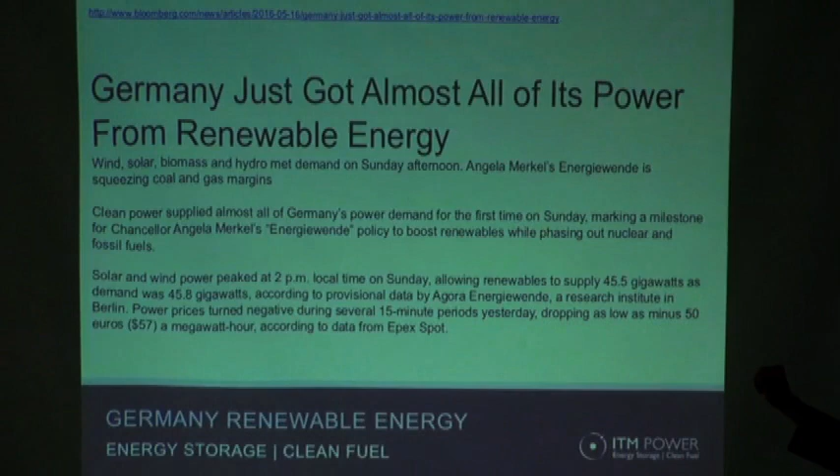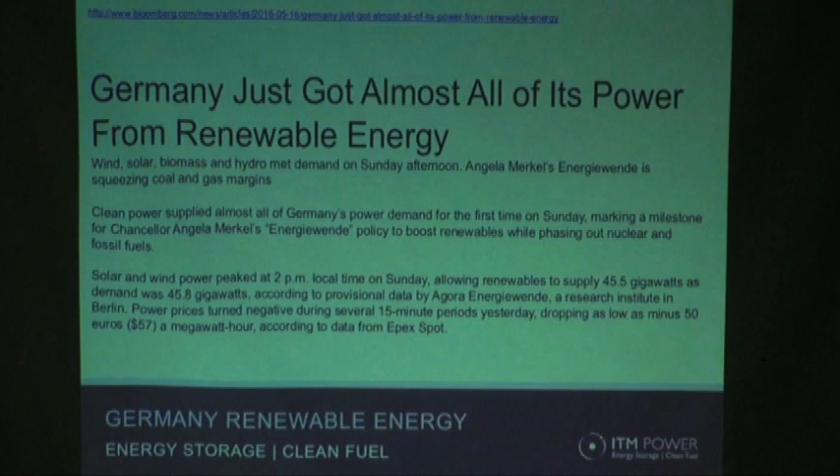This last weekend, the Germans actually produced from renewable energy roughly 46 gigawatts of power, and their demand was just slightly higher. So in essence, what they achieved on Sunday was providing all of their demand requirements with renewable energy, which is a huge milestone, right?

Angela Merkel is obviously on the pathway of making it happen. She was the chancellor that really put into place photovoltaic and wind, and stopped nuclear power plant production of energy in the future. So that's the story. In the presentation there's a link to the Bloomberg article, which is quite interesting to look at in terms of this milestone. I thought I'd throw that in just to show you what's going on in other parts.

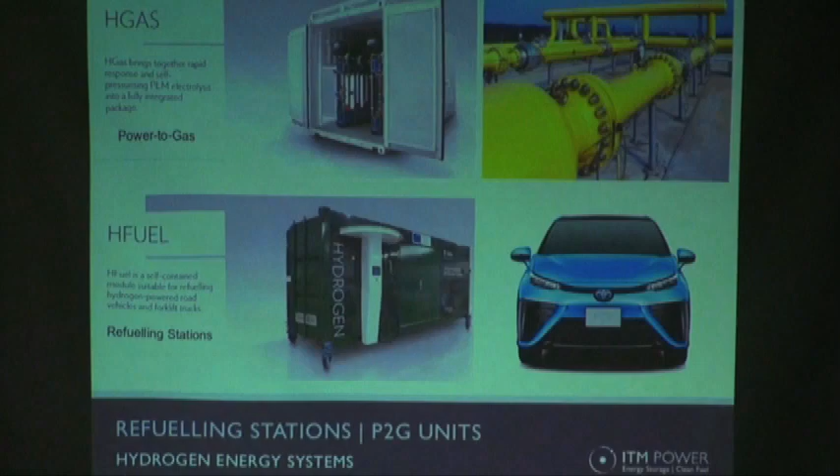So what does our company do? We make hydrogen, and the key is to make hydrogen out of excess energy. I'll show you some graphs later on. When you have an abundance or predominance of renewable sources, you end up having a very variable supply, and also in many cases large excesses which are currently being curtailed. The idea is, what can we use those assets for instead of being curtailed, and store the energy? So we'll talk a bit about that.

The businesses we're involved in are fundamentally generating hydrogen from excess electrons and then using that hydrogen for a value chain that makes sense. You can actually use the hydrogen to generate electrons if you wish. It's not a very efficient system, but it's an opportunity. You can also use that hydrogen for the production of ammonia, for a fuel or for fertilizers.

The other part of our business, and we were talking at lunch about electric vehicles, I'm a fuel cell electric vehicle guy because I don't want to sit around for three hours and charge my car. I'd rather fill it up in three minutes and drive away, with a range that holds up even when it gets cold. Nevertheless, I think battery electric vehicles are going to find a place. We support the provision of hydrogen for the operation of fuel cell electric vehicles. We'll show you a few pictures of what's happening in other parts of the world. So that's what the company does.

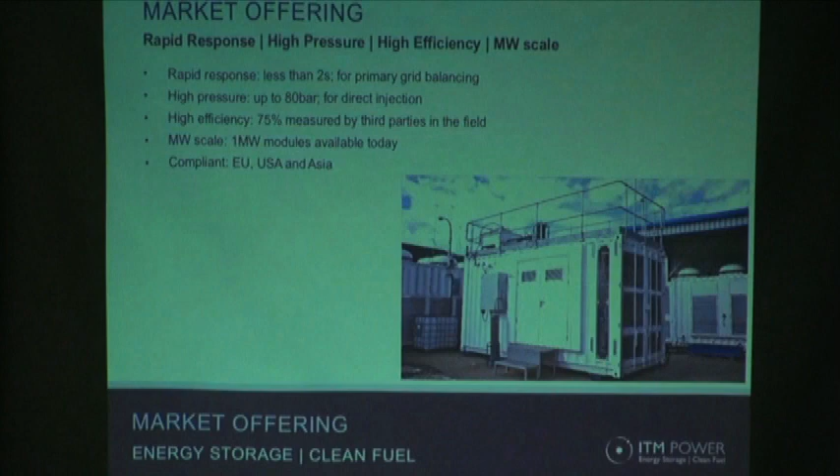What we make and deliver as our fundamental products into the marketplace are PEM electrolyzers. Now you might ask, electrolyzers have been around for decades, what's new? The electrolyzers of the past used a specific type of membrane that operated the product at a stable, constant level, and provided hydrogen from electrolysis primarily as a feedstock for the chemical industry. What's happened is electrolyzers are now being pulled more into the energy industry, meaning they have to accept variable quantities of energy supply to produce hydrogen.

So they become demand response type products. The technology that we and others, including companies like Siemens, are now producing are PEM electrolyzers, solid membrane products. For the electrochemists in the audience, ITM is an acronym for ion transport membrane. That's where the company had its foundation, in polymer chemistry, producing a membrane that is now used in the electrolyzers that they sell.

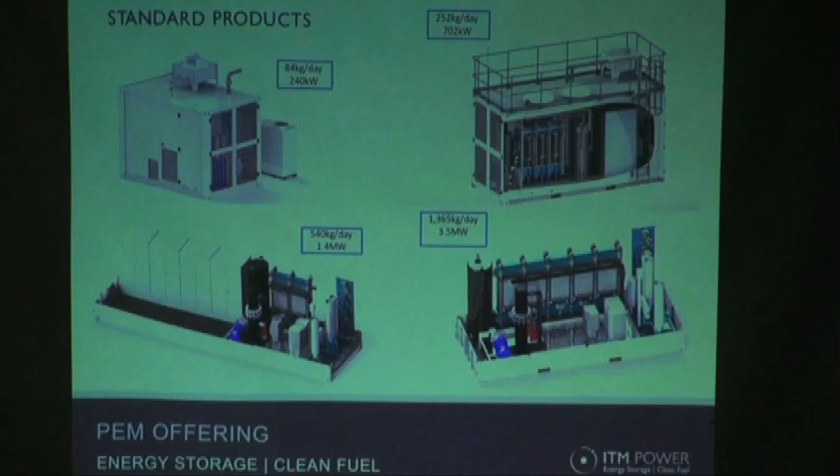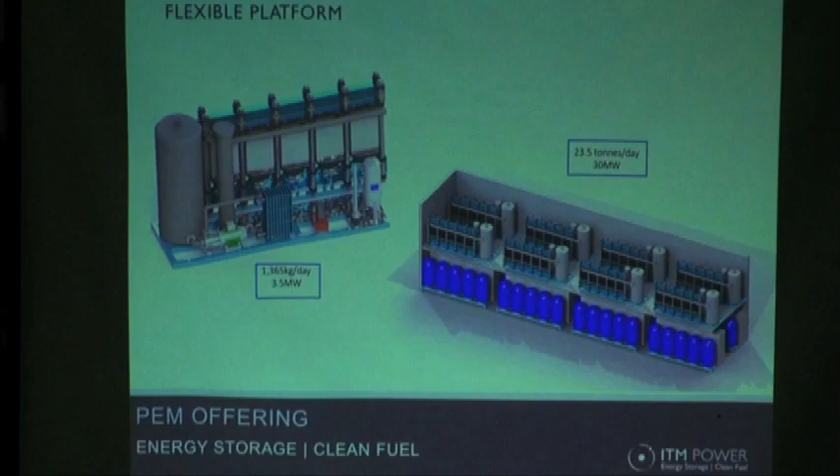A bit more about the pallets, just to give you an idea. We have a standard set of products that we deliver into the marketplace, basically a quarter megawatt up to a 3.5 megawatt product, using state-of-the-art electrolyzer stacks to convert water using electricity into hydrogen and oxygen. We also have the ability to customize products in terms of size. I've been in discussions with Bob over the last year plus, and things have changed since then in terms of our cost reduction, so things are happening pretty quickly in terms of providing competitive products into the marketplace serving the energy industry.

So this is all background information. Let's talk a bit about the rationale behind what we do and what we supply to the market in terms of being able to use that energy. Why hydrogen as a fuel?

When you think of renewable energy and a renewable energy chemical, what comes to mind? Hydrogen is probably the most abundant chemical fuel on the planet. The only challenge is that it's bound up in water, and that's what the electrolyzer does - it separates the hydrogen from the water.

It separates the hydrogen, and produces oxygen together with that. That's basically how an electrolyzer works. It's simply a membrane in the middle, surrounded by catalysts, with electricity applied to specific electrodes on either side of the membrane. On one side, hydrogen is generated, and on the other, oxygen.

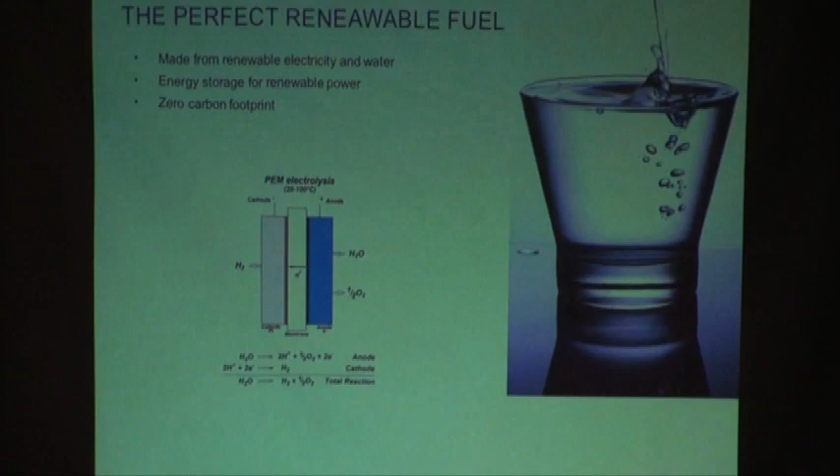So for the non-chemists in the room today, think of the school electrolyzers we used to play with, putting two terminals into a beaker of water.

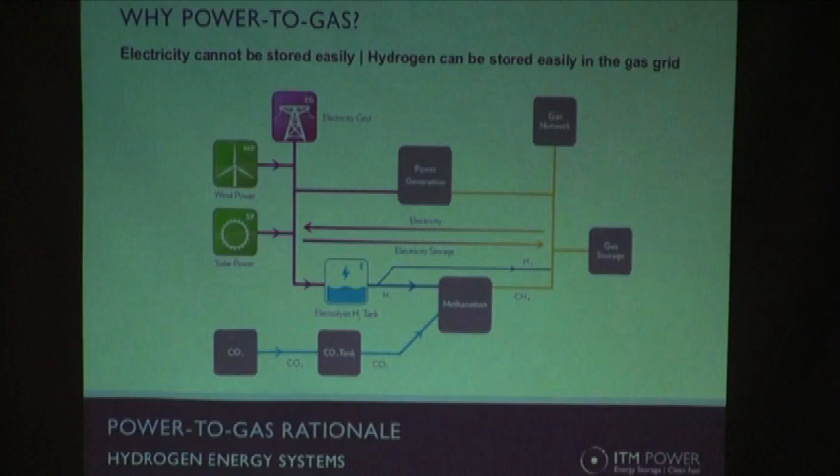Energy storage - a term called power to gas was invented, or founded, by a German engineer approximately 15 years ago, when Germany started deploying a lot of wind energy, which generates electrons mainly at night as opposed to during the day when they needed the energy. As time progressed, they thought about ways and means of storing it.

How do we store energy that comes from turbines, or in the south from photovoltaic sources? Basically, the idea was: we've got, in their case and in many parts of the world including North America, huge storage infrastructures. In fact, the largest energy storage infrastructure we as humans have installed on the planet is natural gas grid networks. In North America, our gas grid networks store roughly 60 days of energy.

I'm not sure whether you realize that, as opposed to only delivering it to homes and industry, they store energy. The Germans store roughly about 3 months, and so did the folk in the UK. So it fundamentally provides an asset where you can store energy.

And what's happened as part of the story in Europe is that they store the hydrogen, not only as hydrogen, but inject it into the natural gas grid network up to a specific percentage - that's called power to gas, one of the pathways to power to gas.

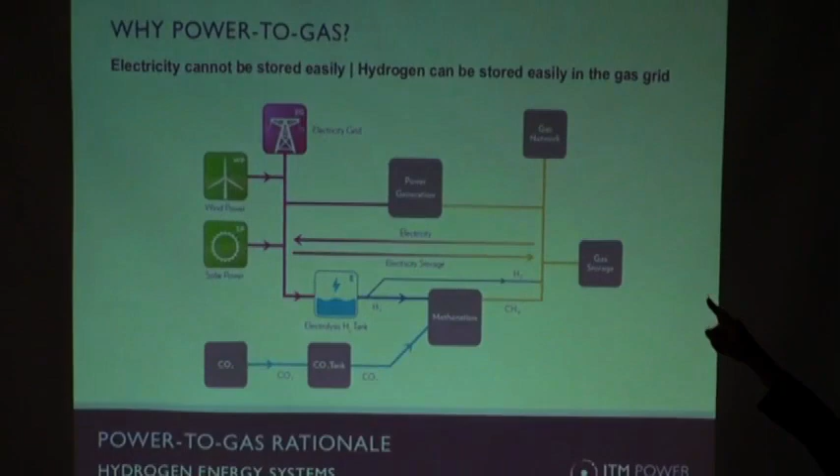So when you look at the picture, on the left-hand side is generation - the actual electrolysis producing hydrogen. Of course, the oxygen has value, but we don't capture it now - it's vented to the atmosphere. It can be captured and used.

And then that hydrogen is either directly injected into the natural gas grid network as a storage medium to be used - use your imagination, whatever natural gas is used for downstream.

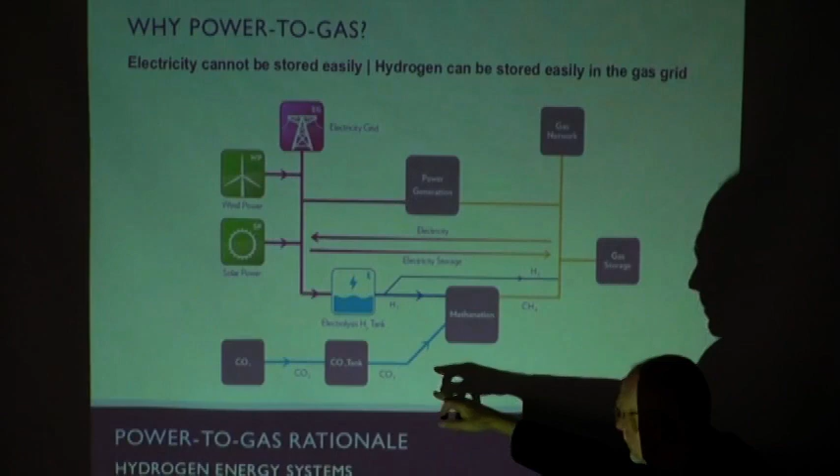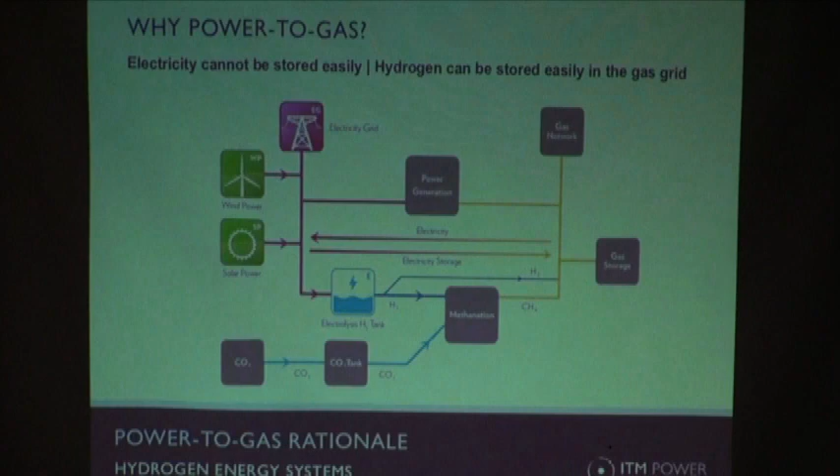Or it is reacted with CO2, preferably carbon neutral, from sources like anaerobic digesters, wastewater treatment plants, or dairy farms. Any source with anaerobic digestion of organic material is a candidate, producing synthetic methane that then goes into the grid.

There's a lot of work happening in Europe to help grid owners also become green - in other words, to provide renewable heat, which is the fundamental and primary purpose of gas grid networks throughout the world, heat as opposed to electricity. So that's a bit of the background in terms of power to gas and some of its pathways.

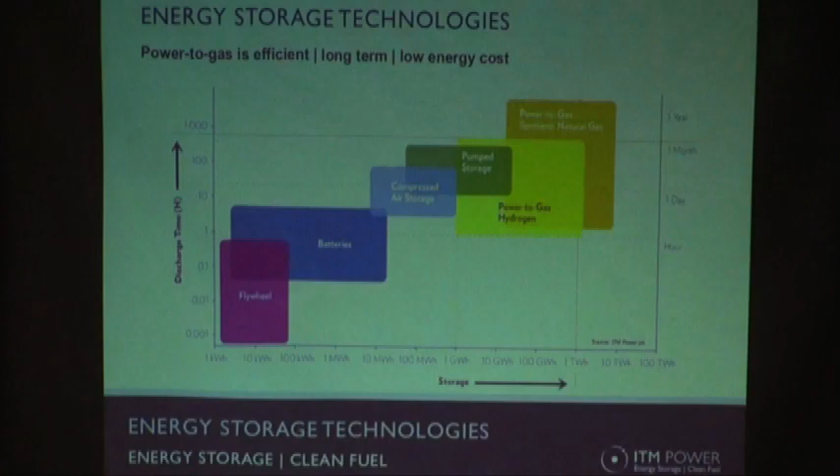Energy storage - maybe some of you have seen something similar to this, but this is quite an interesting graph in that it talks about energy storage across a number of continuums from a technology perspective. On the far left you see flywheels, and as you move up the order you see batteries of different shapes and sizes, flow field batteries, compressed air, and in that large storage sector at the top right, pumped hydro, which is probably today one of the largest seasonal energy storage technologies, followed by power to gas, either using hydrogen and methane, or synthetic methane.

Now you might ask, why and how do we put hydrogen into a natural gas grid network? Because hydrogen has a totally different burning and oxidation characteristic to what natural gas, primarily methane, in fact has.

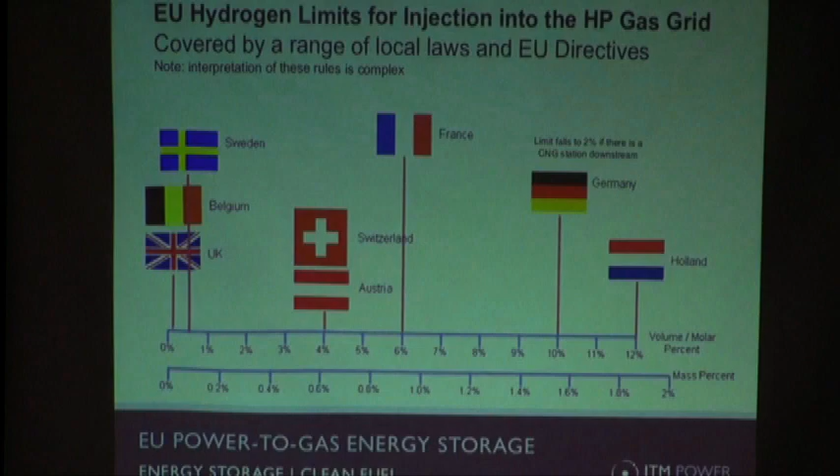There have been a number of studies on this, and there are limitations in terms of how much hydrogen you can put into the gas grid network before the flame burn characteristics change. In Europe, the country with the highest limit is Holland, and for historical reasons the lowest is the UK, although 20-30 years ago the UK had town gas in their systems, which is roughly 60 to 70% hydrogen. The reason those levels exist today has to do with rules and regulations associated with the purchase and supply of natural gas, primarily from Russia.

The change in Europe is taking place where the natural gas grid networks will probably, throughout the European Union, accept up to 5% hydrogen in their gas mix, which will not change the calorific value of the gas and will not change the burn or flame speed characteristics of natural gas either, but will provide terawatt hours of energy storage, for example, from wind turbines that are currently operating and being curtailed.

I'm sure you'll have questions about that at the end.

Here are some examples of the plants we have in place. This is the first one we put in place, just outside Frankfurt, east of Frankfurt, on the Main River. We did this project with one of the largest utility companies in Germany, the Thüga Group, which operates as a consortium, a collaboration of various utility entities around Germany.

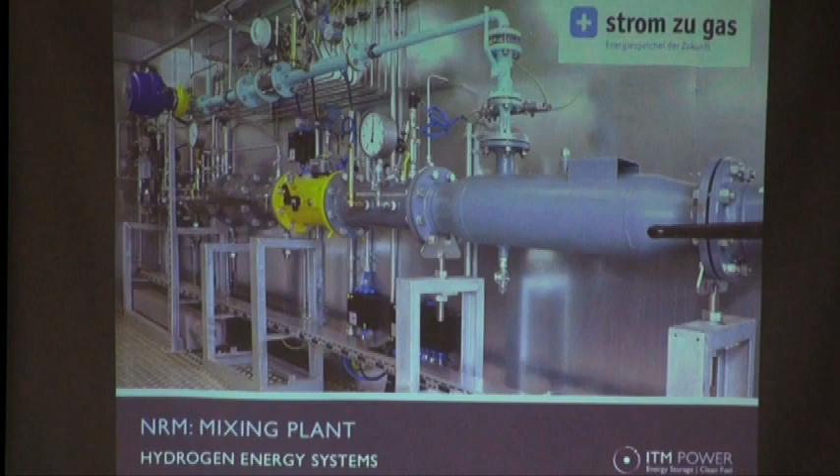This plant takes excess energy and, at a transmission distribution gas node, puts it into the gas stream up to approximately 2%. Why 2%? Because just down the road from this plant is a CNG compression facility that produces CNG for vehicles, and they asked to keep the level down because they have metal tanks in the cars. That's the gas mixing plant there for you.

Our second project was with RWE, a very large German utility entity that is currently having major financial problems. They have red figures on the bottom because they haven't really joined in and are only slowly coming on board with these new types of technologies being deployed throughout Germany.

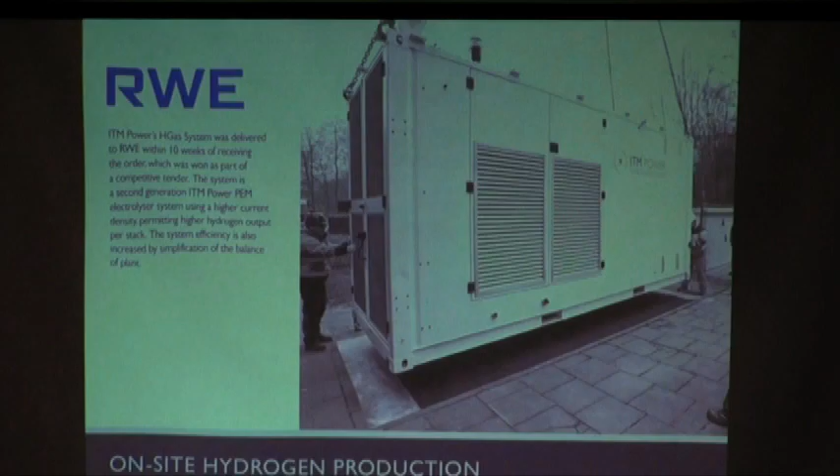Just a really interesting one - we talked about district heating. This particular unit is quite interesting because it's at a transmission distribution node linking transmission lines and distribution. They reduce the pressure, which cools the gas, and they get freezing and condensation. They use the heat out of the electrolyzer to heat up the gas so that doesn't happen, so the efficiency goes up to about 90%.

Two other projects we have in terms of energy storage use hydrogen in a completely different way. This is quite interesting - hydrogen is generated from excess electricity, stored, and then used by the DLR, the German aerospace entity that looks at future development of aerospace applications, including the use of fuel cells in planes as APUs. We have delivered, I beg your pardon, we will deliver a 1 megawatt unit to them, and they will use excess electrons from wind generated through the grid into this system to generate hydrogen for a number of sources, including fuel cells.

This is a project that I think, Bob, you responded to when you saw some announcements go out. We have a 0.5 megawatt system installed at the European Marine Energy Centre in the Orkney Islands. This is the first unit that got delivered, and the second one we will deliver during the course of next year - it'll be a 1.5 megawatt unit.

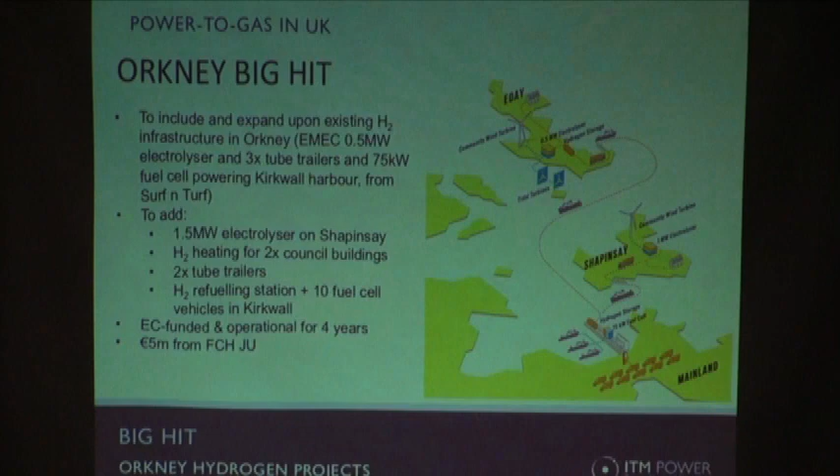The other plant, on Shapinsay, will have not a 1 megawatt but a 1.5 megawatt unit, which will also produce hydrogen again for mobility. So again, this is all excess renewable energy being used for a number of purposes, primarily in this case electric vehicles. The partners in this project include a number of pretty large organizations, including companies that make fuel cell vehicles.

Power to gas. This is probably the largest consortium of energy storage power to gas organizations in the world. It's operated and managed by the German Energy Agency based in Germany. And what's really quite interesting is that they have a comprehensive and well summarized description of power to gas.

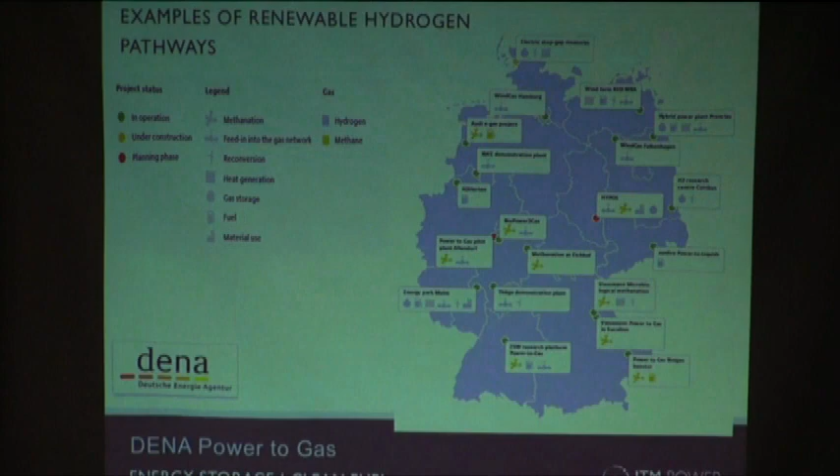And how excess energy from photovoltaic and wind is being developed and evaluated in Germany. What's really cool about this, and we've talked about ammonia, in this particular case you will see there is an industrial application for the hydrogen. We're not involved, but that is in fact the use of that value being generated for the production of ammonia, not as a fuel, but as a fertilizer. When you look at this map, the two plants we have are Thüga, and the other one is RWE up here.

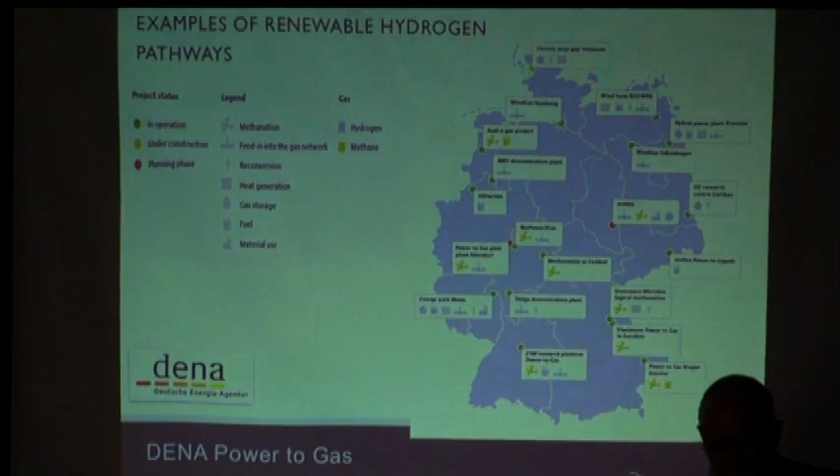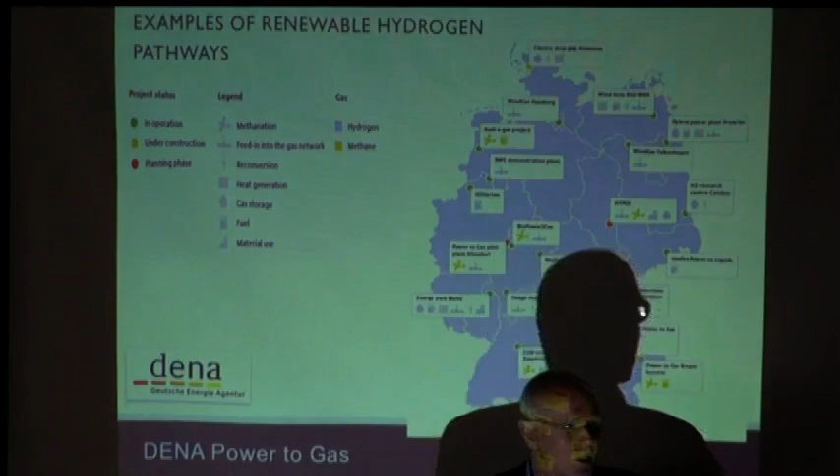And I talked about synthetic methane. This organization, Viessmann, the Viessmann MicrobEnergy, they also have another one - Allendorf, where their headquarters are. What's really very interesting about this technology is all of the pathways you can use to create a value chain with that excess energy from renewables. So it doesn't have to be the injection of hydrogen to the gas grid network. It can be a combination of a number of things, and I'll talk more about that as we move along.

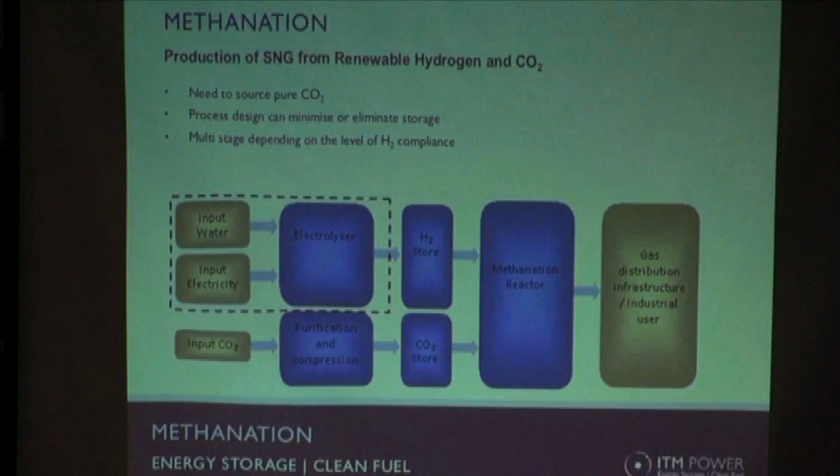Let's talk a bit about generating synthetic methane. The production of methane is actually quite an old technology from a chemistry perspective. It's called the Sabatier reaction, and it's been around for a long time. What a number of companies are doing now, because for example in California they have a mandate to decarbonize their gas grids, and the only way they can do that is to think about using that infrastructure with a green gas. So biogas or synthetic methane is the pathway being pursued.

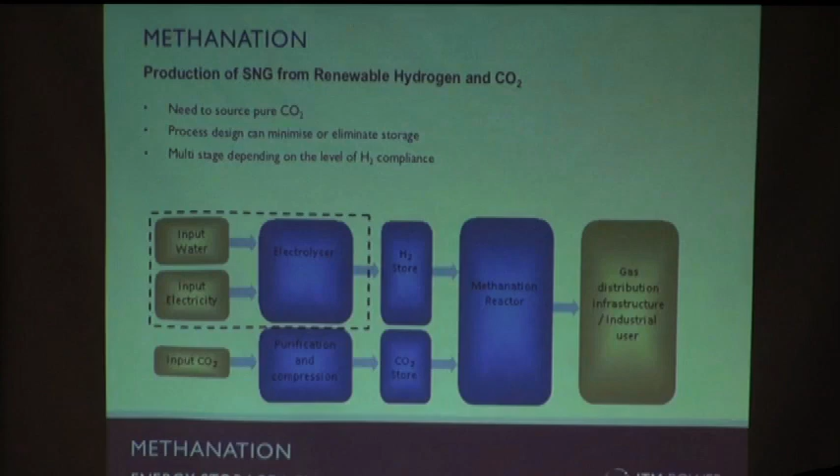This provides another opportunity using CO2 from wastewater treatment plants or breweries or distillers, or folk that produce alcohol for fuels. CO2 is a byproduct, and it is relatively carbon neutral. Using that CO2 and reacting it with renewable hydrogen generated from wind or photovoltaic or marine, whatever the source is, or hydro, to produce methane that is then distributed back into the grid as an energy storage mechanism, in a grid that has huge storage capabilities.

There is a bio-path being developed as well by that company I showed you, Viessmann MicrobEnergy. There are a few companies, in fact, doing it that way.

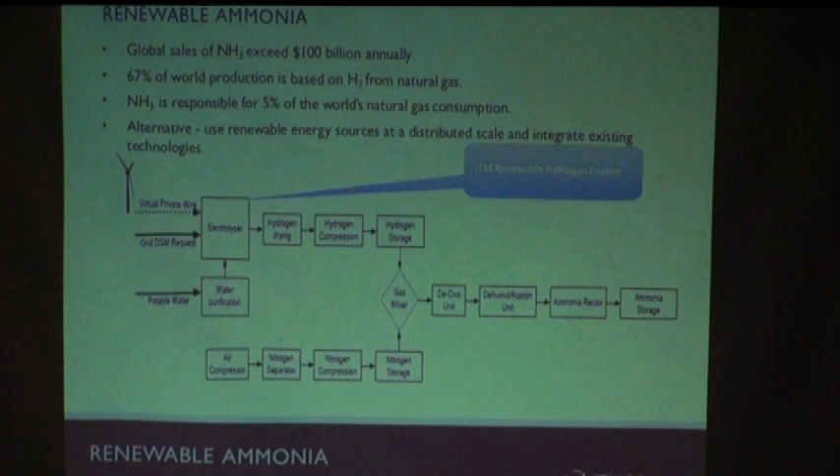Let's move into the world of ammonia. I don't know whether I have that chart up here, but the production of ammonia as a fertilizer is the second largest consumer, as a separate industry, of natural gas for hydrogen that is reacted with nitrogen in the atmosphere to produce ammonia as a fertilizer. And the European Union has recently challenged industry to begin moving that hydrogen away from natural gas through steam methane reformation, into the world of taking the hydrogen out of water or from renewable hydrogen sources like biogas.

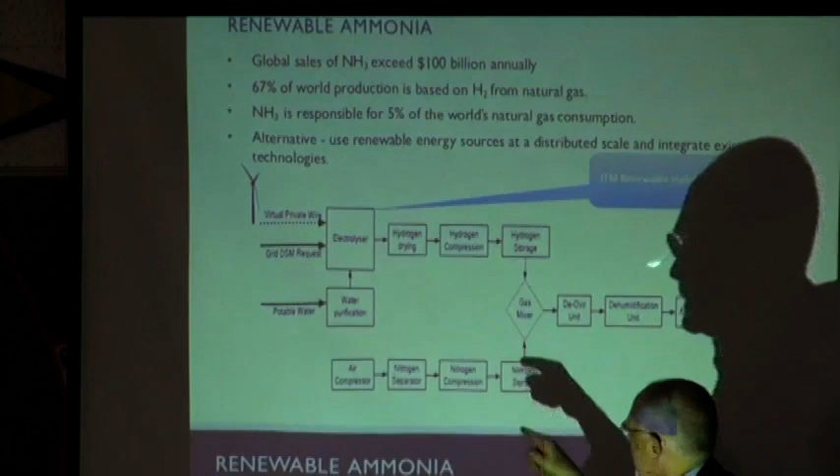And what we've done as an organization is begun a project, which I'll show you in the next slide, that takes the hydrogen through a small reactor to generate ammonia, which then gets reacted with CO2 to produce urea, another form of nitrogen as fertilizer, used primarily in Europe as a solid material. But this particular pathway is really a very simple exchange of hydrogen from water, and then using that hydrogen to basically generate ammonia for whatever purposes are required - as a fertilizer or as an energy vector.

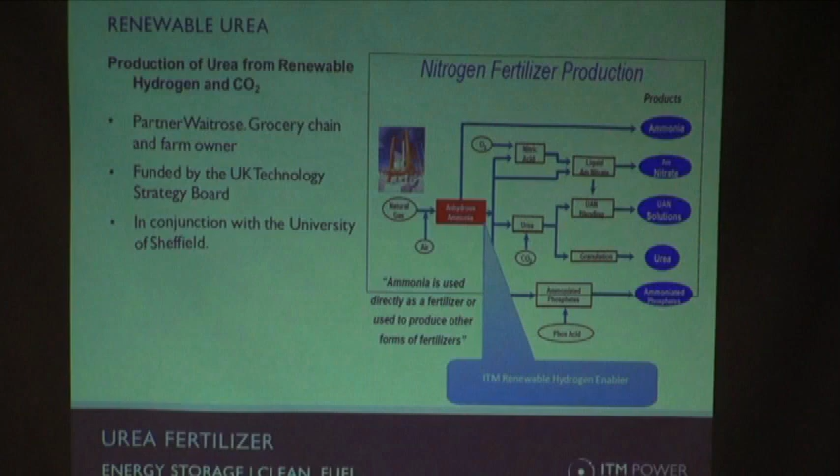The project we have underway at the moment incorporates two partners: the Waitrose Grocery Group, which owns a number of farms in the UK, and the University of Sheffield, who are designing and developing the micro-reactor to produce the actual ammonia. The other partner, of course, is us, in terms of generating the hydrogen from an electrolysis unit.

Looking at the actual pathways, what we're doing is reacting the CO2. The concept is to take the CO2 from the dairy farms' anaerobic digesters and use that CO2 so it becomes more of a sustainable cycle, using what's available and using the excess energy - primarily in the UK's context, wind, excess wind energy.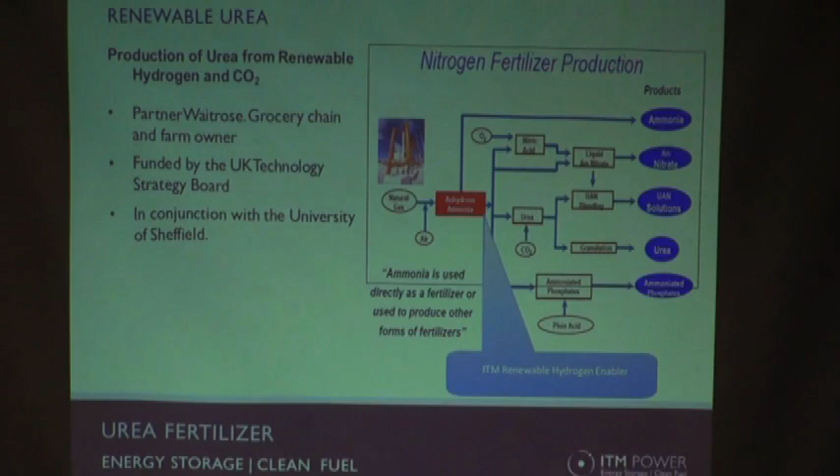This is just a further chain in terms of how the ammonia-based products go from ammonia to ammonium nitrate, a combination of urea, ammonium nitrate solutions, urea, and then ammoniated phosphates. Phosphorus is the other major fertilizer, alongside phosphorus, potassium, and nitrogen. And those pathways are being evaluated by this particular group we're working with.

So we are involved. We've also got another project we've applied funds for on this continent that I cannot say too much about at the present moment, but it's going to pursue pretty much the same pathway as we have here. The chemistry is the same: making ammonia using the Haber-Bosch process and developing a reactor that's cost effective from a small scale perspective.

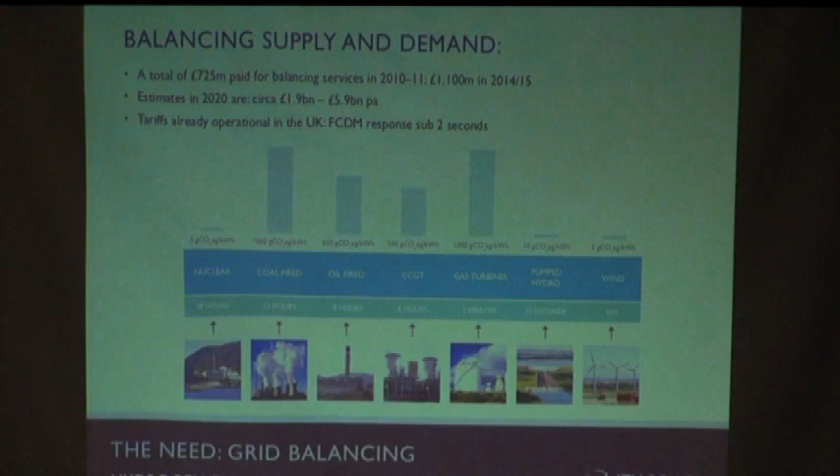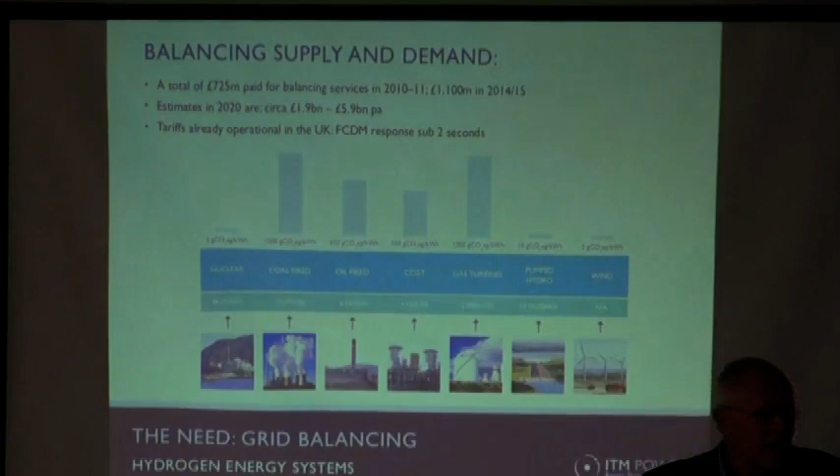Here's another interesting pathway. We talked a bit about it at lunchtime today in terms of what electrical grids require. If you look at the left-hand side of the table, the diagrams, we move from base load or base producers of energy, electrical energy, from left to right, going through a number of variables that show you very clearly how responsive they are.

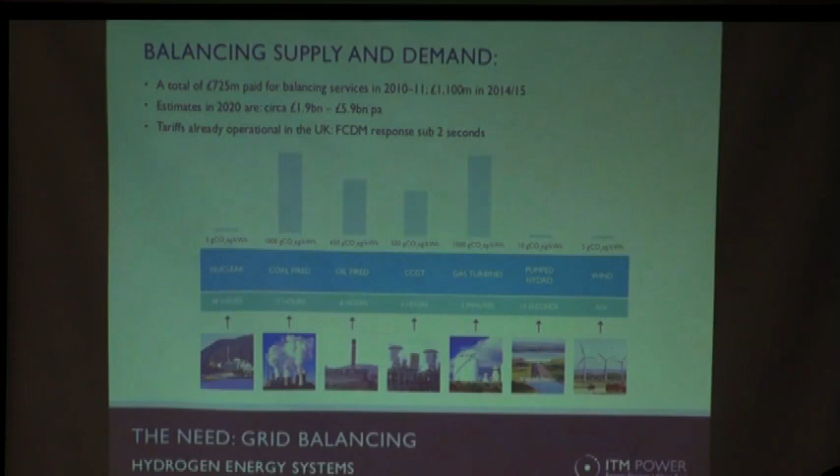If you've got a nuclear plant or a coal plant and you have excess energy being produced versus demand, how do you turn it down? What you do is have demand response customers who buy that energy from the source under specific contracts. That's one of the other focuses our organization is now looking into and is in fact adopting.

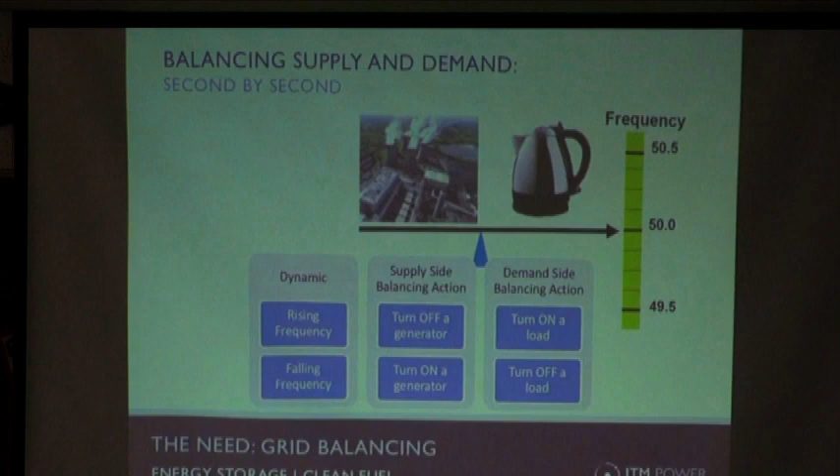That's the use of electrolyzers, water electrolysis units that generate hydrogen as a renewable energy vector, and also act as a load on the grid to either absorb demand response or to operate and provide frequency regulation. So in the world of ancillary services, we look at how we can generate revenue streams from that energy storage concept, from excess renewables coming onto the grid in greater quantities as we put more and more in place.

In this particular case, we use an electrolyzer. The first picture I showed you, of the Thüga unit, is actually registered in the German balancing market and is operated somewhere between 100 and 0%. That's always kept operative, and so is the gas.

Mainova, the utility company, is able to quote the system onto the market, which is an auction market. When frequency either increases or decreases, they can actually ramp up the load of the electrolysis unit or ramp it down. So they form a generation and a demand response product—a quasi-generation and demand response product—to serve balancing markets as well. There are a lot of really interesting additional opportunities in terms of what this technology can offer.

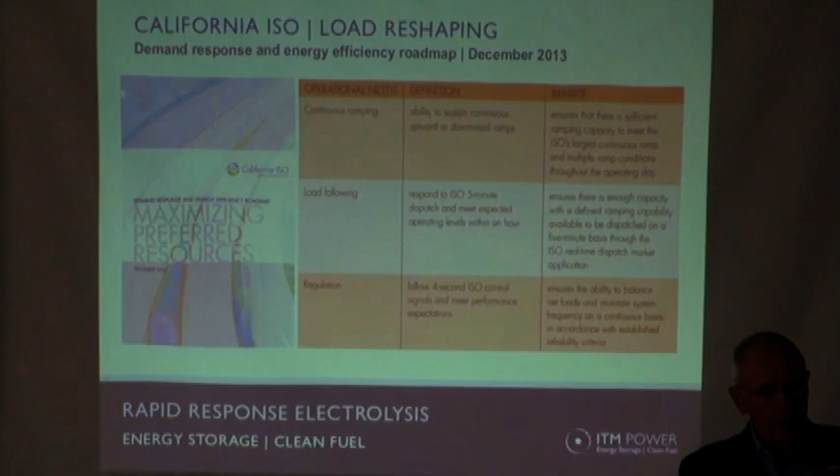California—I thought I'd show you this particular picture because CalISO... you don't have any ISOs in your neck of the woods yet. I guess there have been many talks about that over the decades.

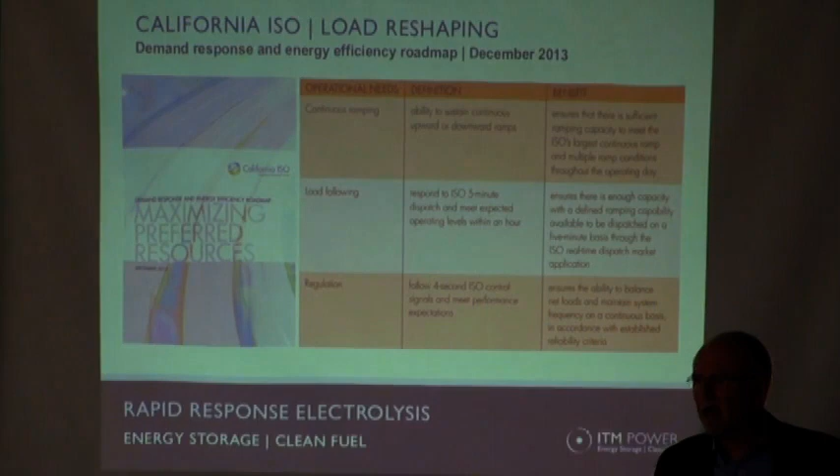CalISO is adopting a regulation market where you have to respond within 4 seconds. In fact, they've changed that to 2 seconds. So you have to have a load that's extremely responsive. That's why PEM electrolyzers or batteries actually offer those opportunities.

Can you explain what ISO is?

So CalISO—ISO stands for, I'm not too sure of the exact acronym breakdown, but it's the system operator. These folk have a central operating building quite close to Sacramento, and they sit in front of a big screen that shows their grid and all their producers.

Then when they move into the world of imbalance, they turn things on and off, and there are lots of rules and regulations about how that in fact works. So CalISO, ISO New York, New England—they have an ISO, an independent system operator organization that controls grid stability fundamentally by either providing load or spinning reserve, getting online and generating electrons.

We talked about electric vehicles. The market we focus on is pretty much the same as a battery electric vehicle, except that we generate hydrogen that gets stored in a tank and is then put through a fuel cell that generates electricity to drive the wheels. Pretty much the same as a battery electric vehicle, except you can fill it up in 3 to 4 minutes. There are companies putting these vehicles on the road, and these guys have got cars on the road.

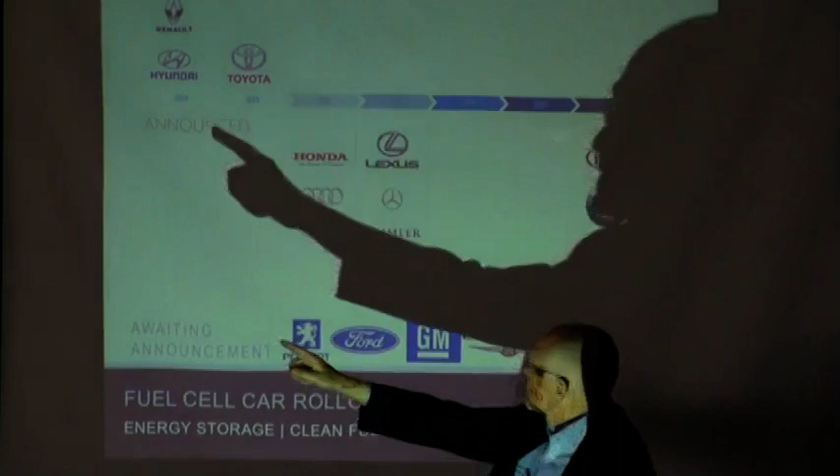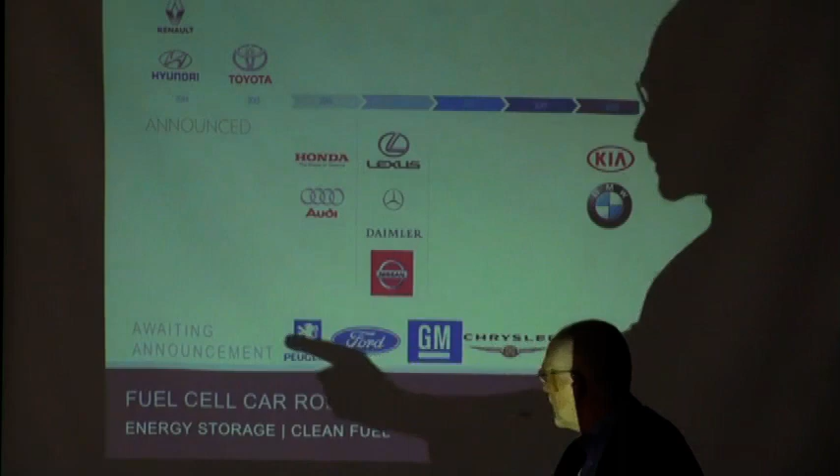The Tucson, they've got about 100 units in California. These guys, the Mirai. Honda has just announced their new Clarity. Audi, Mercedes announced at the beginning of this year. They're all on board. These are the guys that haven't made up their minds yet at the bottom. But those organizations that in fact have fuel cell programs are bringing those cars onto the road. And that's a market again for excess electricity, hydrogen generation that can compete with gasoline or diesel.

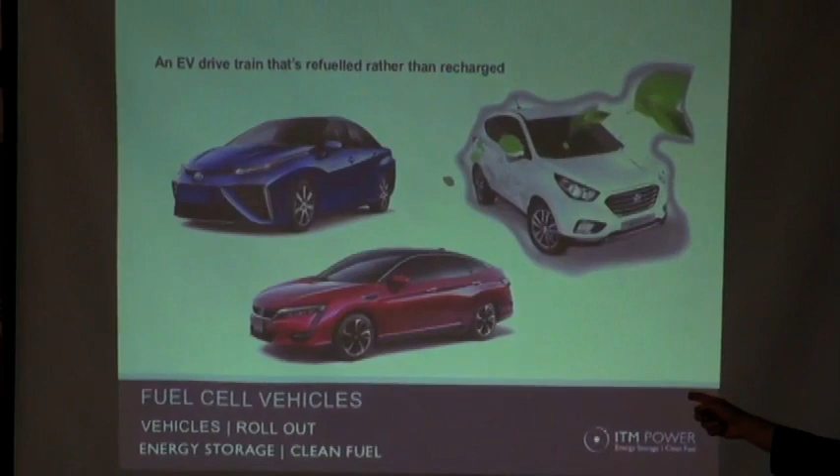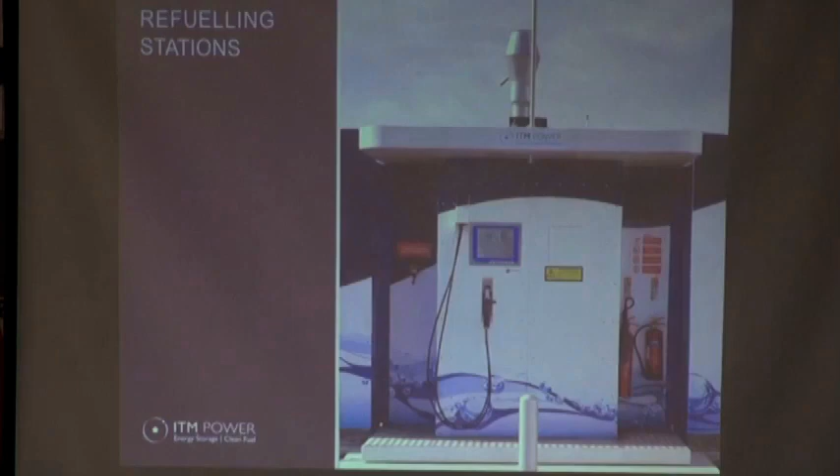A few pictures of the cars. The Mirai in the top left, the Tucson, and the new Honda vehicle on the bottom. This is an interesting refueling station. I thought I'd show you a picture of this. This is in Rotherham, quite close to Sheffield. And this particular fueling station actually serves fuel mainly to those cars that ITM in fact own. They own a number of Mirais and they own a number of Tucsons, iX35s they call them in the UK.

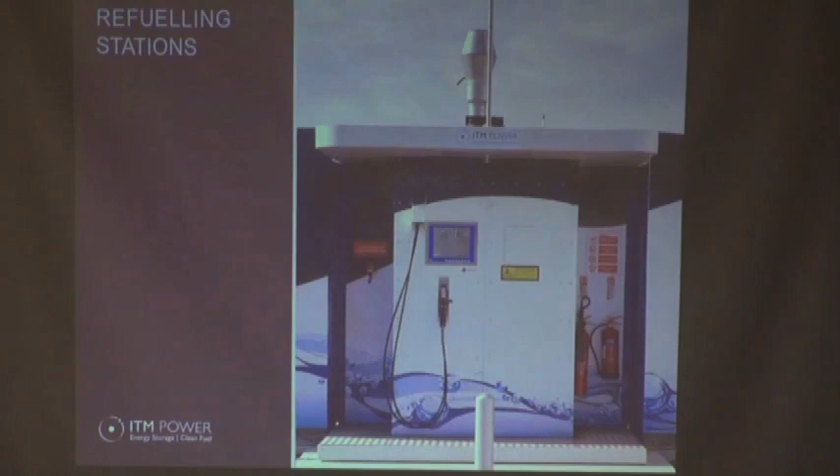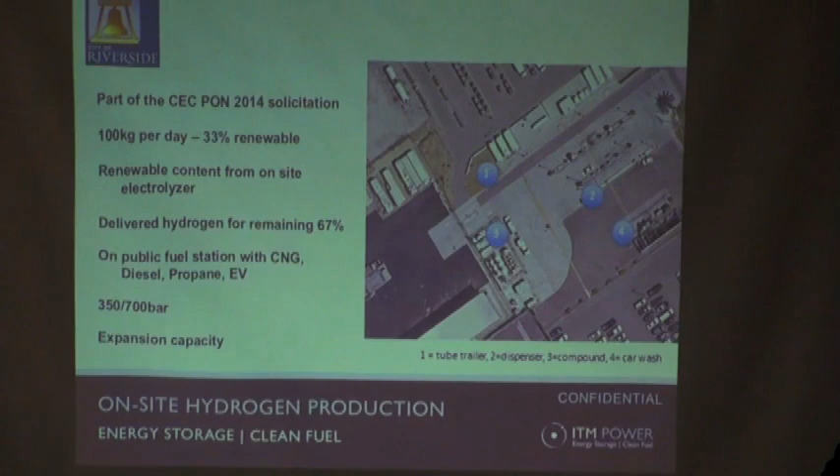And all of the electricity that is used to generate the hydrogen on site here comes from an on-site wind turbine. It's completely carbon free. There we go. There's a picture of the turbine in the top right-hand corner. And we also have a number of refueling stations that we're putting in as a company into California. This is at the city of Riverside at their fueling yard. This is at Hyundai's R&D center in Chino. And those two will be coming on stream this year.

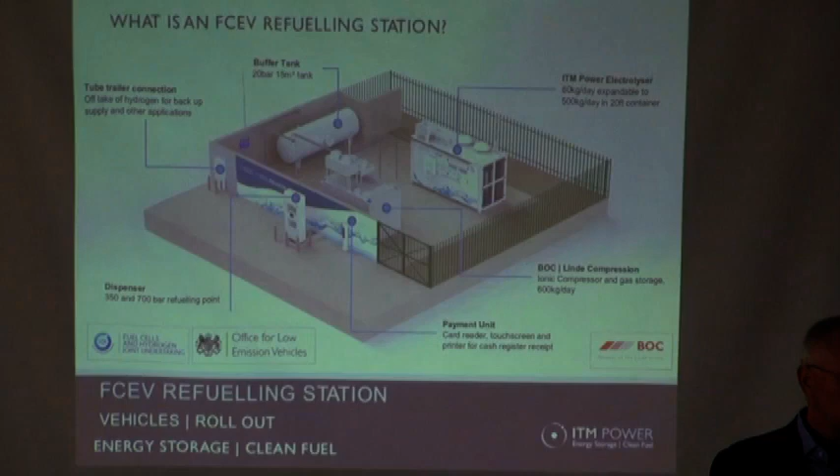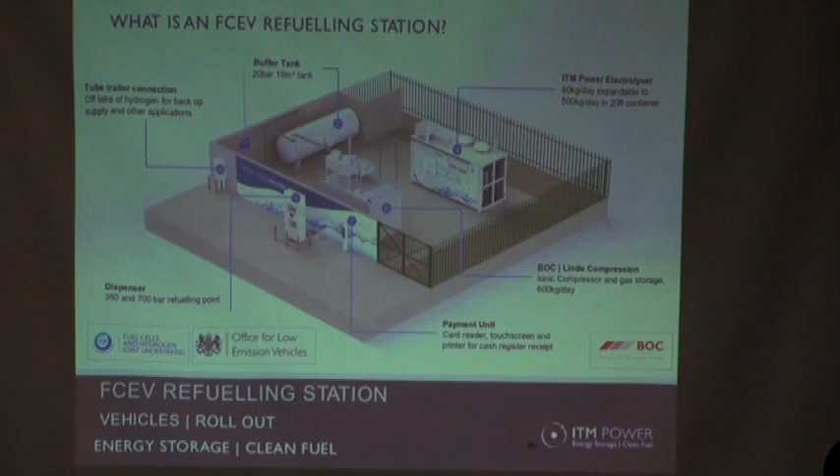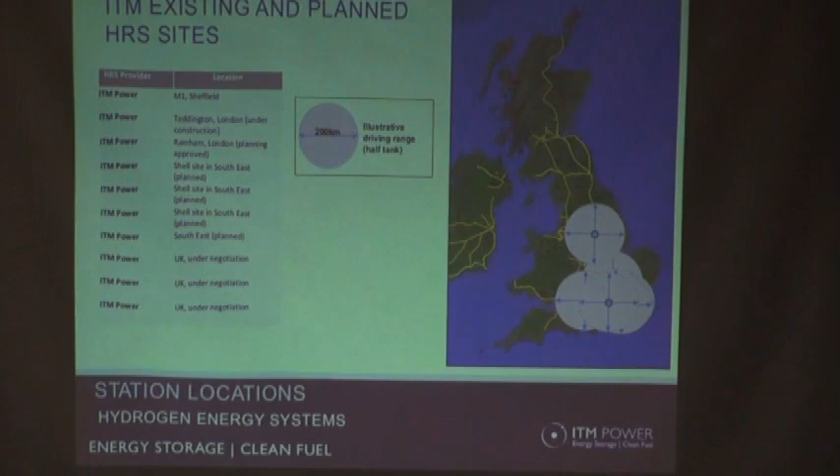This is what a typical fueling station looks like in terms of on-site generation. That's the dispenser. That's buffer storage. You have to compress the fuel to get the range. The fuel is compressed, the hydrogen, up to 900 bar, about 12,000 psi. The vehicle's carried around at about 700 bar. Those are the stations we're putting into the UK. We've teamed up with Toyota and with Shell Oil. We've got 3 to 4 gas stations that our systems will in fact be deployed on, just to give you some background information.

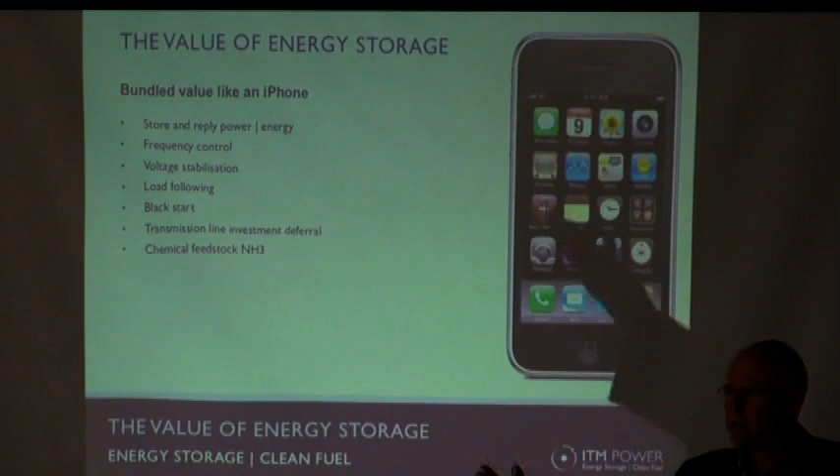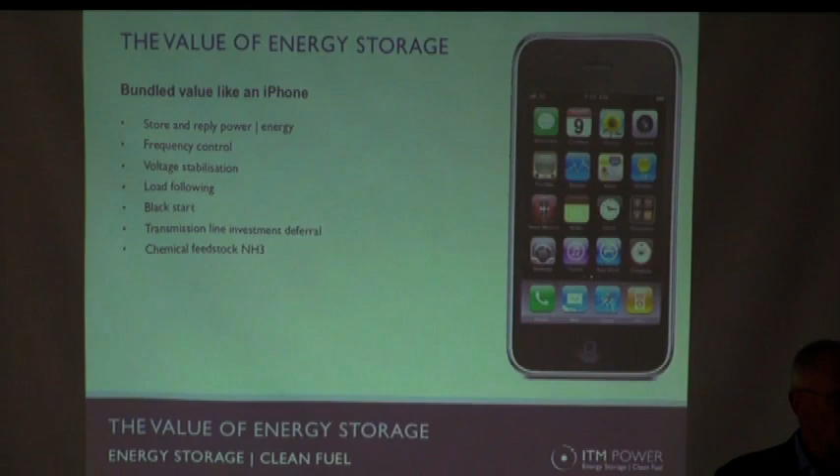And we talked about this last night. In the world of energy storage, we no longer have a phone that is a phone. That's no longer a phone. So when you look at it in terms of what the technology offers, our CEO picked this up and said, this is a really great analogy. If you look at what energy storage is all about, storing energy, frequency control, voltage stabilization when we have a load and we have power conditioning up front, load following, black start, the technology can operate like a battery within seconds, milliseconds. Transmission line investment deferral, again, one of the big challenges we face in terms of the deployment of microgrids or distributed grids. And then chemical feedstock. So when you think of it, it's really interesting in terms of what the opportunities are for the future.